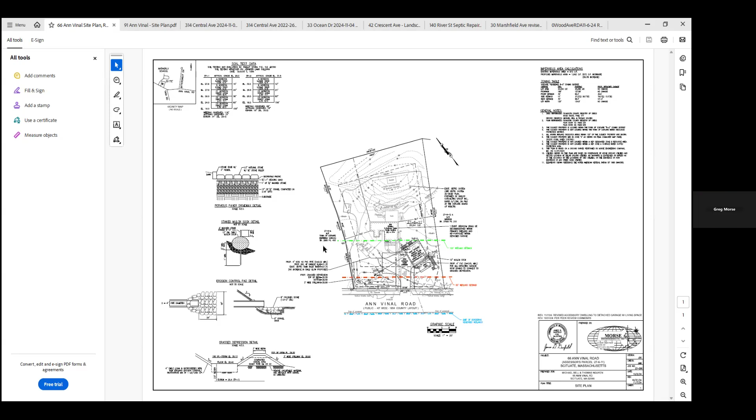Jen? Yeah, I'm familiar with this, I grew up on Ann Vinal. Same comment as Penny - I appreciate that we're really out of the 50 on this and pushed back, looks like, as kind of as far as it could go reasonably.

Okay, Eric? Yeah, it's one of those funny setbacks, right, where the road is in between the 50 foot and the actual bordering vegetated wetland. But no comment really or question, I think everything looks good.

Thanks, thank you. Richard? I'm good. Jen? Or comment - did anybody in the audience have comments for this one? I don't see any hands raised.

I don't really have anything to add to Eric's point with the wetlands being on the other side of the road. It's already separated by a paved road and a sidewalk, and it's pretty much a developed area now anyway, so I don't see any issues there.

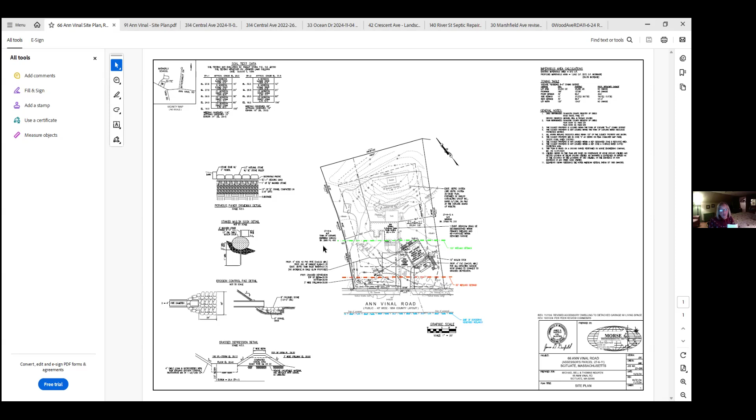Okay, can we close and issue, Jen? That's fine with us, that's fine with me. Okay, I make a motion to close and issue orders on 61 Ann Vinal Road.

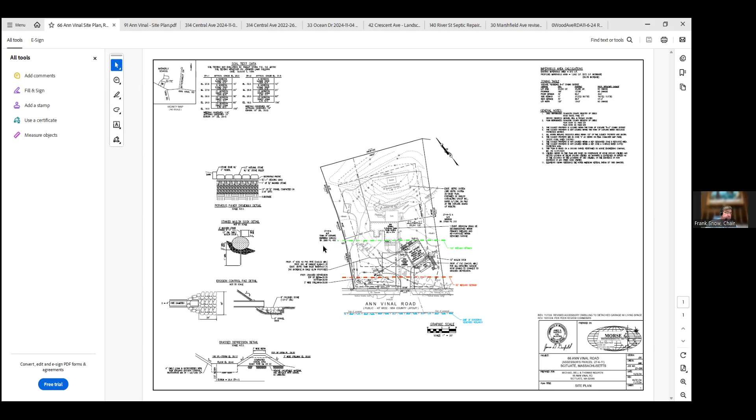66, oh I'm sorry, 66 Ann Vinal Road. That's from Penny, do I have a second? Second from Jen. All in favor - Richard, yes. Eric, yes. And Frank, yes. Great, thank you, thank you.

So now we're on to 91 Ann Vinal Road. This is a new one, on December 16th, 6 p.m., the Scituate Conservation Commission will hold a wetlands hearing under Chapter 131, Section 40 of the Massachusetts General Laws and Section 30700 Town of Scituate Code of Bylaws regarding the notice of intent application of Lennox Realty Trust for installation of a septic system and drains associated with the construction of a new single-family dwelling located at 91 Ann Vinal Road. Abutters and other interested parties are invited to attend. Information on how to access the virtual meeting is available on the town website.

Great, thank you again. For the record, Gregory Morse, registered engineer, Morse Engineering, representing the applicant Lennox Realty Trust. This is a notice of intent associated with the site work at a new single-family home at 91 Ann Vinal Road. The site is 20,089 square feet, all of which is upland area. To the left, the southwest corner of the property, off-site in blue, is a bordering vegetated wetland. Extending off of that is the line in red, which is the 50-foot no disturb zone, and in green, the 100-foot wetland buffer zone.

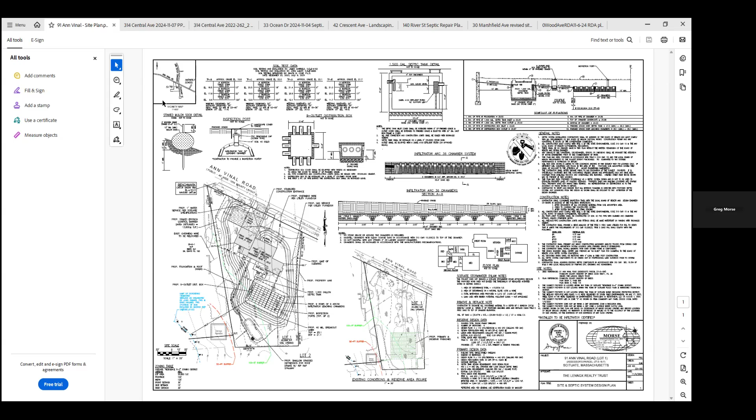Can we zoom in a bit more on the plan? Yes, no comments from DEP.

Most of the work is out of the 100. Having said that, the grading is for the septic that is needed for the house. There are some established trees that were lining the previous driveway. I assume they're coming down. Yeah, the house would kind of be in that area.

There was a concern from an abutter a few doors down on Ann Vinal about water from the front yard and driveway going towards the road and heading towards her home. That was just a concern from an abutter that I shared with Morse Engineering, and I wasn't sure what more could be done in that front yard area.

The only other thing I wanted to mention is the house next door that's being proposed will be on our January agenda.

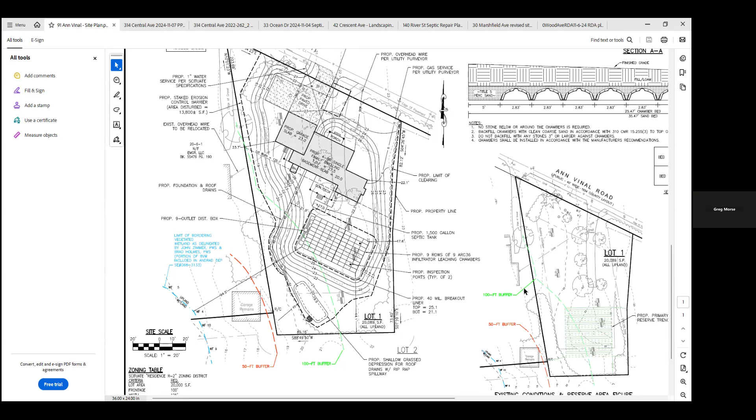There's an area sort of off the sun deck with a 20-foot contour that bends in - there could be a tree there, one more towards the street, out near lot 1. Just seems like there ought to be some replanting, the site's going to get stripped almost entirely. Yeah, I can understand that and have our botanist put together a planting plan, adding some native trees around the site. Certainly, we can do that.

Well, why don't we get that on the plan, and then we can close and issue at the next meeting if everything's in order. That would be great. So you're talking about the 6th of January, right, Jen? Yes.

I'll make a motion to continue 91 Ann Vinal Road until January 6th. I'll second that. Motion by Penny, second by Richard. All in favor? Jen, yes. Eric, yes. And Frank, yes. Thank you, Greg. Have a good night.

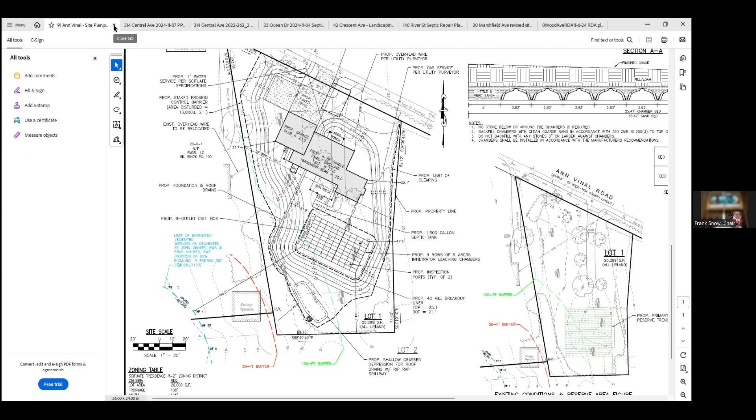314 Central Ave. Central Ave. A deck. Bear with me for one second here. Making a big mess for Josh to sort out.

On December 16th, 2024, at 6 p.m., the Scituate Conservation Commission will hold a wetlands hearing under Chapter 131, Section 40 of the Massachusetts General Laws and Section 30700 of the Town of Scituate Code of Bylaws, regarding the notice of intent application for Brad Stanbridge for construction of a new deck located at 314 Central Ave. Abutters and other interested parties are invited to attend. Information on how to access the virtual meetings is available on the website.

Darren Grady is on the Zoom. If there's anybody else, if they could raise their hand. I see Rick Grady, there he is. Yeah, Rick's on the meeting to take care of this one. He's raising his hand. All right, got it, sorry. No problem. There we go, I'm in now. Okay, all set? Yep, thank you.

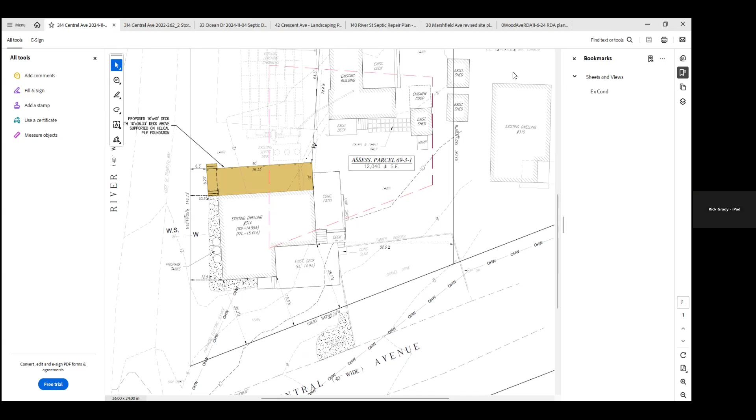Rick Grady from Grady Consulting. This is a proposed deck at number 314 Central Avenue. The proposed deck is 10 foot wide by 40 foot long along the full length of the back of the house. It's a two-story deck, with an upper and lower portion. It's going to be constructed on helical piles, with vertical posts set onto the helical piles. No enclosures or anything proposed below the deck, so it's not going to inhibit any flow of stormwater within the flood zone for this area. I'd be glad to answer any questions you may have.

Okay, thank you. Jen, do you want to start? There weren't any comments about this one from DEP. It was 10 helical piles, I think. And the other piece was just to confirm it's an uncovered deck—I know it's a two-layer one. Uncovered, no roof. And just a reminder, our conditions would include not enclosing underneath the deck, but otherwise I didn't have any other comments.

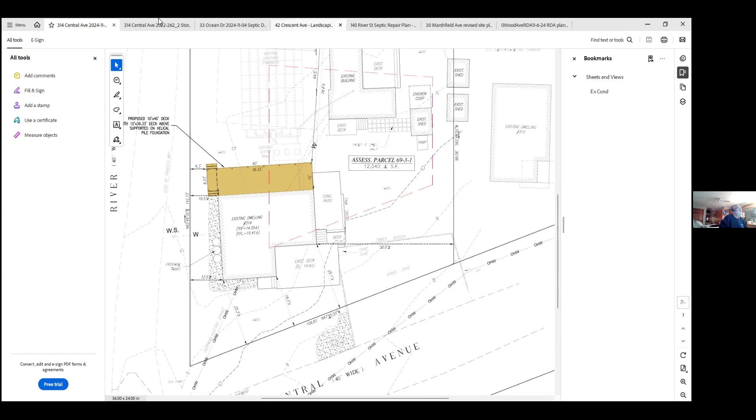Richard, it's your neck of the woods. Do we have a drawing of the helical pilings and all that? I just want to make sure we did. I don't really have a problem the way this is set up, I think it'd be probably okay the way it's described. I went up there today to make sure I was thinking right, and I think I am. At my advanced age, I have to go look. Thinking right's critical, but yeah.

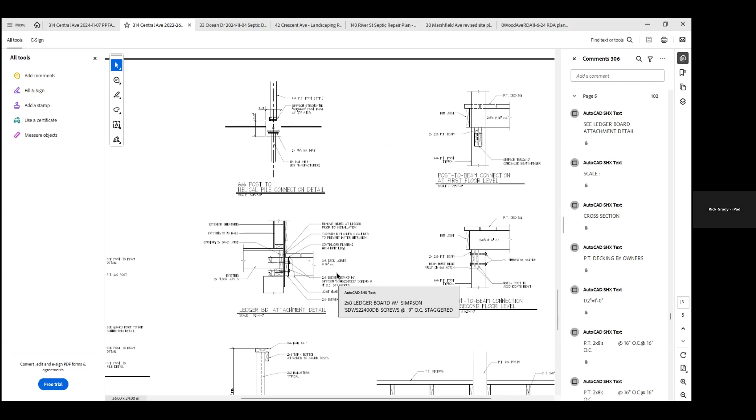Okay, we'll circle back. Penny? The only thing I questioned—there's no roof, I understand that, but it's a double decker, so the upstairs deck, the water will be able to get through the planks. I just don't want the water running off the upper deck. Typical. I believe they're specifying 5 quarter by 6 deck boards with spaces between the boards. The typical space would be about 3/16 of an inch. If the commission's more comfortable putting a condition to make sure there are spaces between the boards, that would be acceptable to the applicant, but I believe it's covered on the structural plan. I just want to make sure—I don't want them too tight. Okay, thank you.

Jen? I think I'm all set. Thank you. Eric? I also am good, thank you. Do we have anybody in the audience on this one? I do not see any hands raised. Okay.

I think, to Penny's point, some of these decks can be built with a product under the deck boards on an upper deck so that water gets shed off, and although it doesn't look like a roof, it really becomes a roof for the lower structure.

Just want to be sure. I'm not seeing any of that on the detail, Penny. No, I just wanted to make sure, since I'm not an expert like you are, Frank, I can't read all this stuff. Well, I just wanted to be sure. It's a double decker. Yep.

Okay, so can we close and issue, Jen? Yes. Can I make a motion, Frank? I make a motion to close one. No, that's not one, it's 314. I'm on the wrong street. 314 Central Ave, and issue.

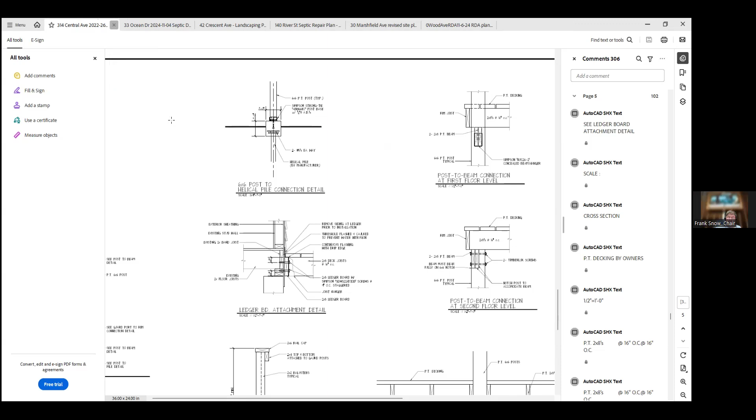That's the motion from Penny. Do I have a second? Second from Jen. All in favor? Richard, yes. Eric, yes. Frank, yes. Okay, that one's good.

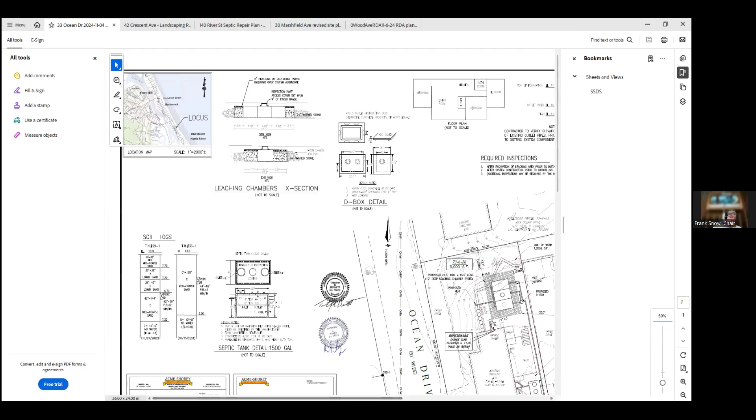Now, 140, I think. So then, 33 Ocean Drive. Yes. Oh, done, 140.

On December 16th, 2024 at 6 p.m., the Scituate Conservation Commission will hold a wetlands hearing under Chapter 131, Section 40 of Massachusetts General Laws and Section 30700 Town of Scituate Code of Bylaws regarding a notice of intent application of Douglas and Barbara Grace for repair of an existing septic system located at 33 Ocean Drive, Scituate. Abutters and other interested parties are invited to attend. Information on how to access the virtual meeting is available on the agenda posted on the website.

Thank you. Rick Grady from Grady Consulting again on this one. This is a property at 33 Ocean Drive on the corner of Franklin Street, an existing home on a 50 by 100 foot lot, 5,000 square foot small lot. They currently have two cesspools to the rear of the house along the right-hand side of the plan. They want to pump and remove those cesspools and install a 1,500 gallon septic tank and a leaching chamber by gravity system on the upper portion of the lot. It is a fairly tight lot. We've requested a setback local upgrade approval from Board of Health to reduce the setback to the property line to 5 feet. The location is basically in a depression or hole, within flood zone elevation 17. Grades in the area of the system are approximately elevation 11. We did not show any erosion control on this because it is at the low point of the two properties side by side here. I'd be glad to answer any questions.

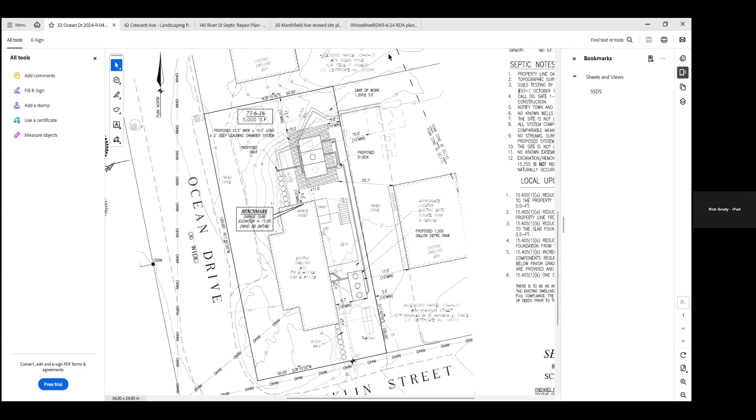So, but now it's 42 Crescent Ave? Right. When they originally filed with us, it was 0 Crescent Ave. Now they have a street number at 42. So I'm going to open this as 42 Crescent.

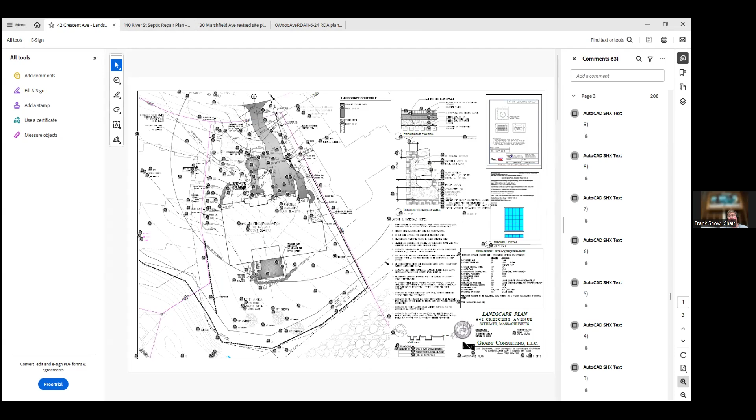On December 16th, 2024, 6 p.m., the Scituate Conservation Commission will hold a wetlands hearing under Chapter 131, Section 40 of the Massachusetts General Laws and Section 30700 Town of Scituate Code of Bylaws to amend the order of conditions issued under DEP file number 68-3096 and deliberate a stormwater application as submitted by Antonio Andrade for work related to the construction of retaining walls and foundation work at location 42 Crescent Ave, Scituate. Abutters and other interested parties are invited to attend, and information to access the meetings is available on the agenda posted on the website.

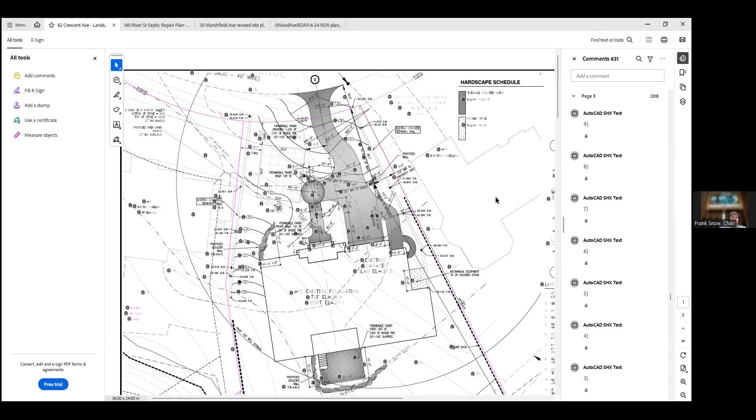We have Jeff DeLisi. Yes. Hi, members of the commission, Jen. Jeff DeLisi, Ohrenberger, DeLisi, and Harris. I'm actually sitting here in my office with Paul Marabito, so Paul is with me as well. You can hear me, right? Yep, okay great. So y'all might remember me and my involvement in this project.

The owner of the property reached out to me because I have knowledge here. To be honest with you, I was a bit reticent to represent him. But I also represent the new owner of the property, which is down gradient directly on the south. And I kind of viewed this as an opportunity to use my knowledge of the project, the fact that I've been in front of this commission many times, and hopefully I have a reputation as somebody who can interject some truth into this. I have an opportunity to help design this and ensure that this project does not have a significant or really any impact, or at the very least is acceptable to my client adjacent to it. So here I am.

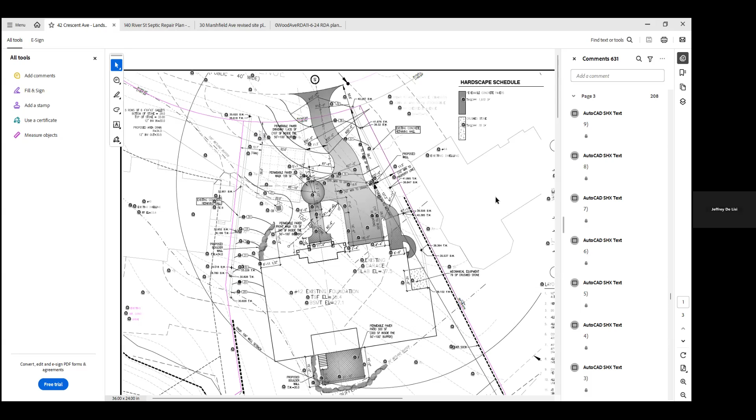We've added as mitigation a significant number of trees, shrubs, grasses, roses, and perennials. We're talking 228 additional plantings that you would see on sheet 2 of your landscape plan. Jen, I'd love it if you could bring that up. That chiefly is along both retaining walls and towards the bottom of the property.

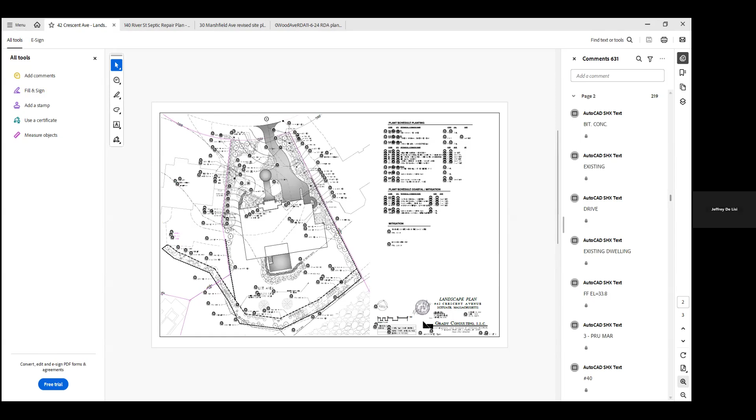Additionally, there's going to be a retention area which is going to capture roof runoff. That'd be sheet 2, Jen. This is, I think, sheet 3. There's going to be a retention area in the front of the property, which is going to capture roof runoff, as well as runoff from the site between the street and the home. And that's going to be kind of to the left of that circular area.

So we have recharge areas, we have significant mitigation plantings, and actually the retaining walls, they kind of help to contain the water on the site. So actually, at the very least, my other client, you're going to see that there's going to be less water running to that property than what the site was in its vacant state. And you're going to also see that there's going to be less water running to the swale along the top of the coastal bank out in the back than what was previously approved. So we think it's a significant change.

We're committed to making the change. I do ask that the commission humbly consider allowing us to begin framing the project as we work through these issues. And I was hoping that the commission would see that there's a significant commitment here to getting this right.

So with all of that, I am sitting with Paul. If you have any questions for Paul, but I'll give it back to Jen or Frank or whomever to ask any questions you want. Obviously, we would be asking for continuance to address Deb's issues and to receive any additional issues and questions she has.

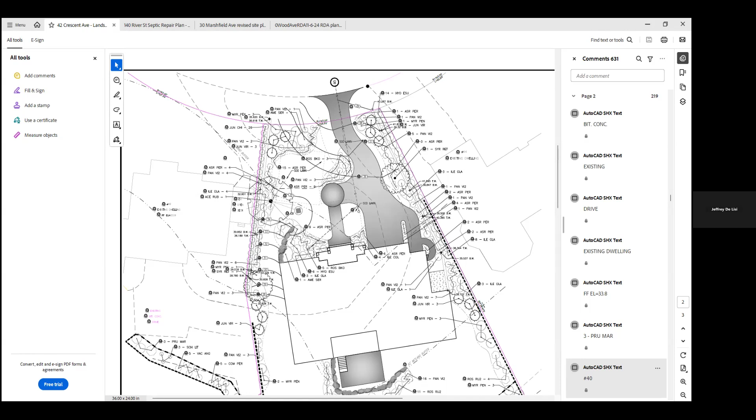I guess we should have our old plan with us. Yeah, the one thing I do recall is that the wall proposed behind the patio on the order of conditions plan, which was previously approved, was a concrete wall. So one of the key changes here is that this would be a boulder wall as opposed to a concrete wall. That's one thing that comes to mind. That's going to be part of Deb's review, but I think the patio is slightly larger than what it was previously proposed to be, but it was proposed to be there. And yes, the wall does kind of wrap around a little. What you don't see on this plan on your screen is there's a whole bunch of plantings on the ocean side of the wall, so to speak, which were not previously proposed at all, like roses and things of that nature.

Okay. Well, I think you've heard from the members what they're looking for - Eric's question about maybe switching up some of the plant material, wanting to see the whole plan, and wanting to hear from Deb on how some of this all fits together. Maybe what would be good is for the next one, I'll try to make sure I have a copy of the old site so we can see the differences.

Did Deb give us any idea how soon she could get back to us for the review? I think she needed some of these questions answered first. Okay, so Paul or Jeff, do you know how quickly they can? You're saying maybe some of the answers are there, but they're on different plans, so maybe it's better if an engineer can get with her to go through some of that. Frank, I spoke with her this morning and she was going to put together a full list of what she's looking for. I said, send that to Jen, we'll take it and work on the plans and get them back to her so she can review them. If she has questions on the revised plans, we'll work with her on that.

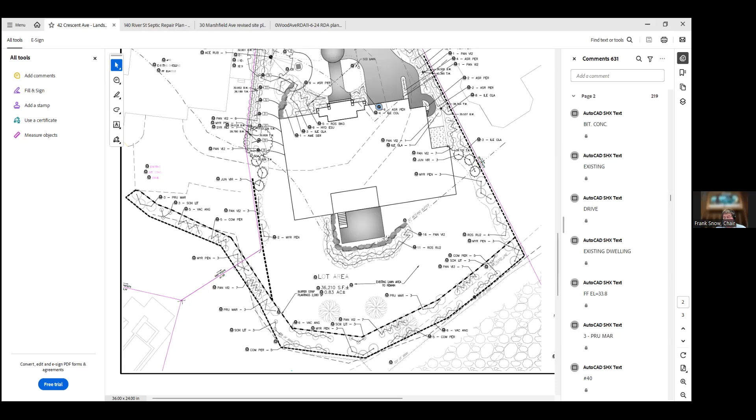Okay, thank you. Thank you very much. Have a happy holidays. You too. Thank you, Jeff.

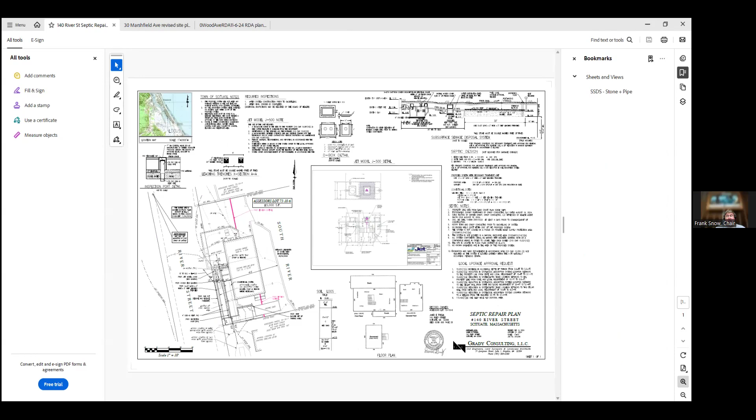140 River. On December 16th, 2024, 6 p.m., the Scituate Conservation Commission will hold a wetland hearing under Chapter 131, Section 40 of the Massachusetts General Laws and Section 30700 of the Town of Scituate Code of Bylaws, regarding the notice of intent application of James Triglia for repair of a septic system at 140 River Street, Scituate. Abutters and other interested parties are invited to attend. Information on how to access the virtual meeting will be available on the agenda posted on the town website.

Good evening, I'm Darren Grady from Grady Consulting, here on behalf of James Triglia. The project before you tonight is a septic system repair. It's on a 5,000 square foot lot, within the riverfront of the South River, in land subject to coastal storm flowage, elevation AE 14. It's coastal dune and a barrier beach.

The proposed septic system is in the location of the existing septic system, where the tank is proposed right now. The existing tank is oriented 90 degrees from that, and there's two leaching trenches that are 32 feet long. There currently exist leaching trenches underneath where they are, but they don't extend all the way to the southernmost property line. The location here is the furthest away from the river that we could locate it.

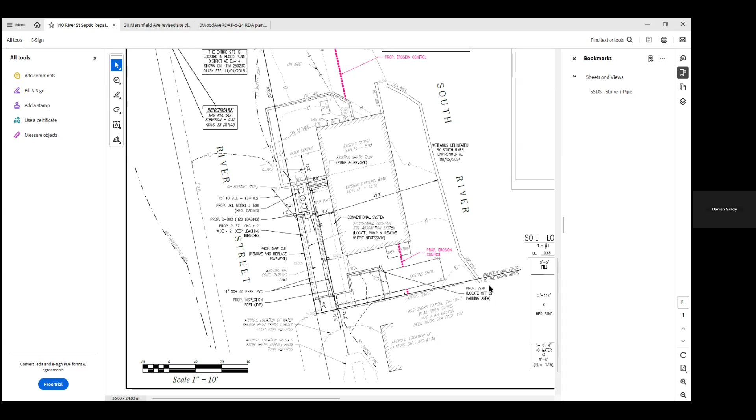The system's currently not functioning, so I would like to give them the opportunity to replace it. They didn't give me a schedule. Can we do that, Jen?

Yes, we do need revised plans at least a week before, and with the holidays that number gets a little bit bigger, so that's just my reminder about that. It is an exceptionally full agenda, so we definitely need everything in advance.

So that would just be the pavers versus the pavement if my client agrees to that. If anything changes on the plan, yes. Okay, I can do that.

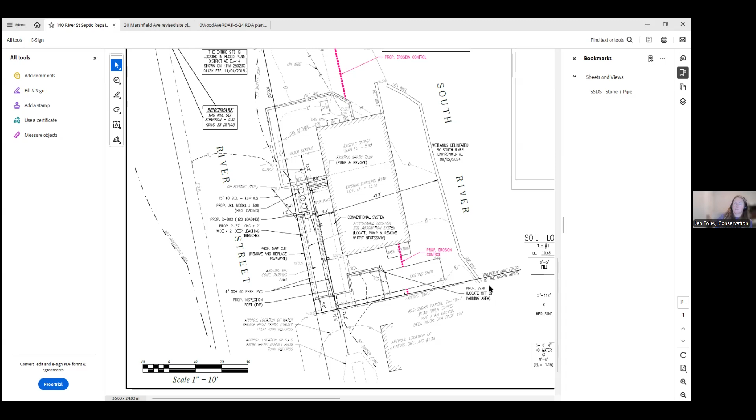So get a motion. I make a motion we continue 140 River Street to January 6th. I'll second that. Motion by Penny, seconded by Richard. All in favor? Jen, yes. Eric, yes. Frank, yes. Okay, great, thank you. Appreciate you putting us on for the 6th. Have a good night.

On December 16th, 2024, at 6 p.m., Scituate Conservation Commission will hold a wetlands hearing under Chapter 131, Section 40 of the Massachusetts General Laws and Section 30700 Town of Scituate Code of Bylaws. We received a notice of intent application for Stephen and Elizabeth Tripp for the installation of a new septic system and accessory dwelling located at 30 Marshfield Ave, Scituate. Abutters and other interested parties are invited to attend. Information on how to access the virtual meetings is available on the agenda posted on the website.

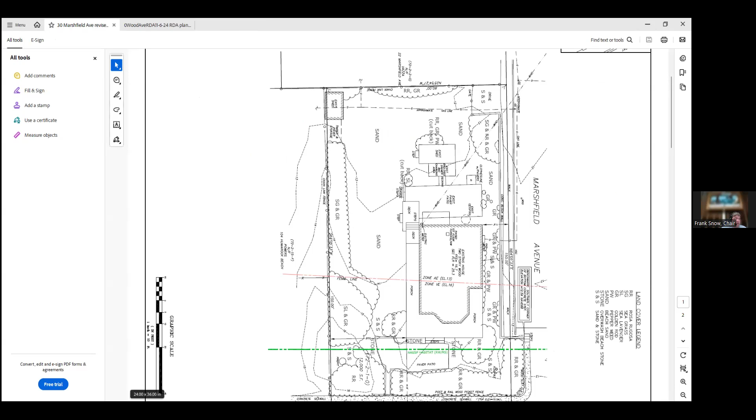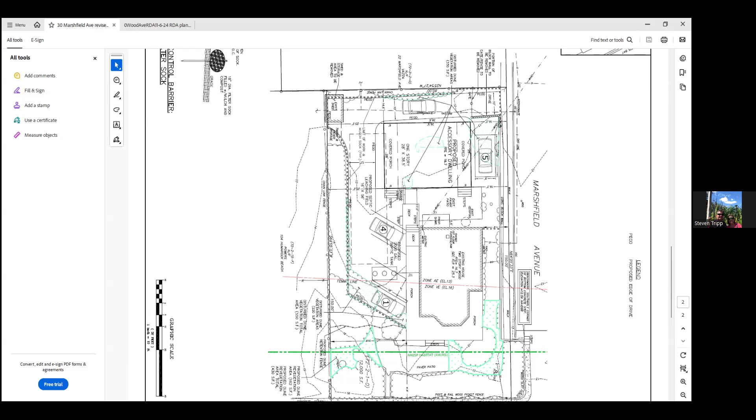Good evening, Mr. Tripp. Good evening. So where to begin? My wife Betsy and I purchased this property back in 1985. We had no business doing that. We couldn't afford peanut butter for dinner. So what we've depended on for the last 40 years is short-term rental income on the primary cottage structure.

We both turned 65 and 66 this past year and hope to downsize and retire in Humarock. We have determined the best approach is for us to pursue an accessory dwelling, for which we have a design and which we presented to town planning last month with a continuation to January 9th. Obviously, to extend that, we do need to upgrade the septic system, which is also part of our application.

We have a design that encompasses a 2,000-gallon tank of an H20 style to be able to accommodate the weight of vehicles. And we have a 920 square foot leaching field, which is currently to the southern side of the existing structure and the proposed accessory dwelling.

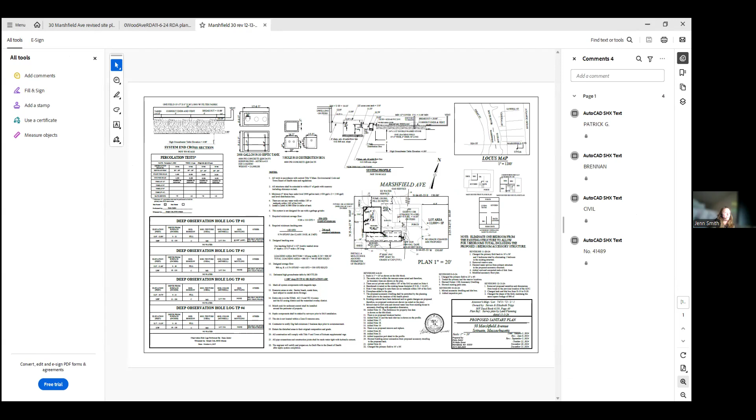Do we have a septic plan? Yes, a revision was submitted to the Board of Health on Wednesday. I think I copied you, or someone copied you on that as well, Jenn, right? So this was one that we received last week, and then today we did get one that shifted it a bit so that none of it was underneath the proposed dwelling.

Correct, you see the jog there that was on the westerly side of the leaching field? If you go back to the original plot plan image, you'll see the dotted line that runs on the southerly elevation of the property, of the accessory dwelling. That was about a foot under a porch. To accommodate the request by Joan, we adjusted the shape of the leaching field to go around that. So effectively, pretty straightforward. Okay.

But this is applied for under one filing, Jenn? Yes, this is one filing.

So the house that's there—I don't think that is elevated. The proposed one, we are at the lowest horizontal members at 15.8, and grade at that point is 13.1. So the existing 100-year-old house is elevated, but not to the V zone requirements.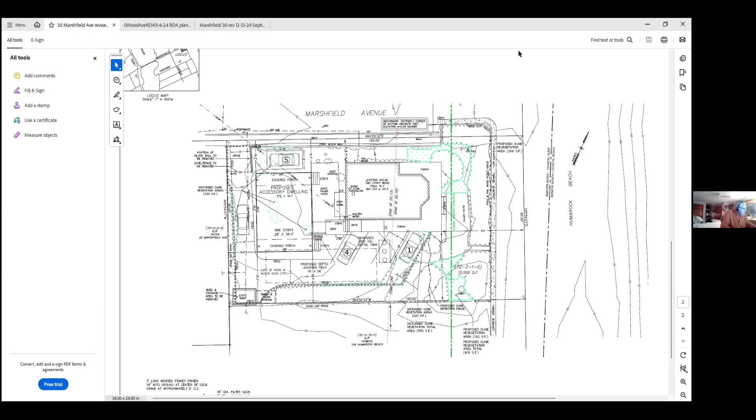Okay, so I'll make a motion. We continue 30 Marshfield Ave to January 27th. I'll second that. Second from Richard. All in favor, Eric?

Do we have Eric? Yes. And Frank? Yes, sorry, yes. Thanks, Eric. Okay, thank you very much.

You're welcome. Now, the next one, I have to recuse myself. But then there's only three of us, so we can't hear it. Is that what we're down to? Yeah, without you it is. Yeah, Jen had to leave. Well, we can't do it.

Can we open this? I think we can open it and then continue it until you have a quorum. You need me to open it? Yeah, Jen, yeah, right. Richard, do you want me to email it to you? Yeah, I guess so. I used to know it but I don't have it memorized.

All right, I mean, can we open it - if we don't open it, it would automatically continue to the next available meeting. If you don't open it? I think we can't go to the next meeting, it's already overflowing. I think you have to open it.

You got Brad Holmes with a hand up too. Yep, okay, Brad, I'm going to unmute you. And I'm sending this to Richard also. And I have to get my other computer, hold on a second. Okay.

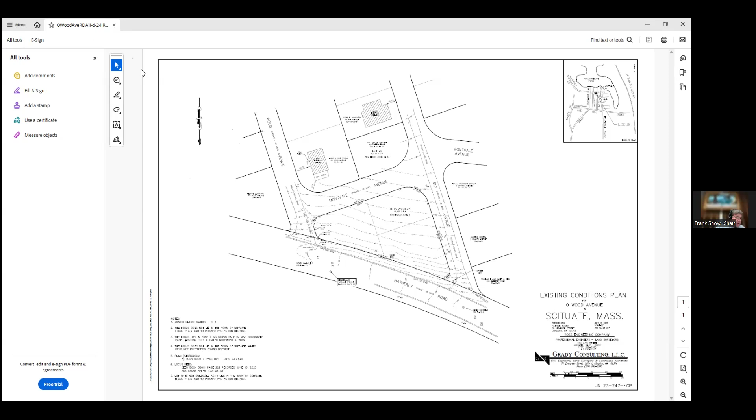So where are we at? Certificates of Administrative Compliance item. Yeah, yep, certificate of compliance. If we have to vote, we can't. Well, no, we can. You're back, Frank. Yeah. Yep, a COC we don't vote on.

So a partial for Brook Street, Jen? Yes, they are done. The house is for sale. They've put their plants in. They're waiting the growing seasons. And hold on, Brad was part of that one also.

Brad, you're unmuted. Thank you, members of the commission. We would like to request a partial certificate of compliance for 31 Brook Street. The project actually constructed less than the order of conditions approved. We had an order of conditions approved in 2023 for a home improvement project with additions, a garage, a deck, a driveway extension, in-ground pool with retaining walls and whatnot. Bill Good is on the call tonight as well. He completed the project. He didn't install the retaining walls or the in-ground pool with patio. But the portion of the project that was in the riverfront still required mitigation, so there was a mitigation planting plan that was completed. The completion report was submitted to the commission.

We know that we wouldn't be in the position to get a request for full certificate of compliance because the commission would be looking for success of the mitigation planting area for at least 2 years. But we would like to confirm with the commission that the rest of the project is in compliance, and that allows Mr. Good to proceed with selling the home. The other aspects of the project will be maintained to include maintenance of the mitigation area and reporting. This gives us some certainty that the project was completed as the commission approved. The remaining portions of the project will remain open until we can go for a full certificate of compliance after the planting area is successful. I can bring up plans and photographs, but that's the gist of it.

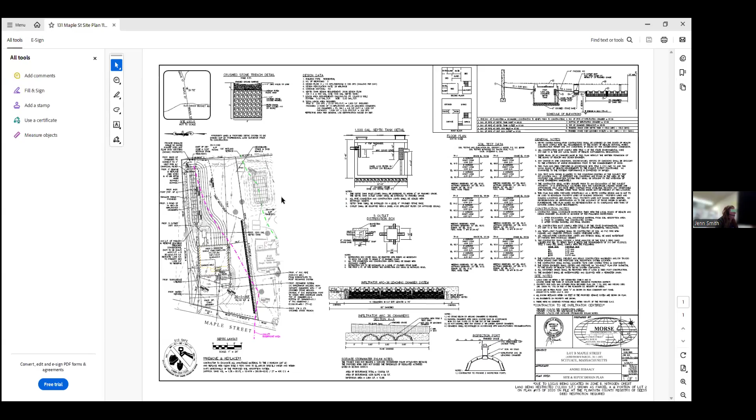The house would go a little bit closer to the road. One of the things we had conditioned originally, but had not put on the plan, was adding some infiltrators. This is in the Water Resource Protection District. So we asked them to put that on this plan.

So they've added that to this, which should then make it... I can't see the plan. I'm sorry, I opened up the wrong one.

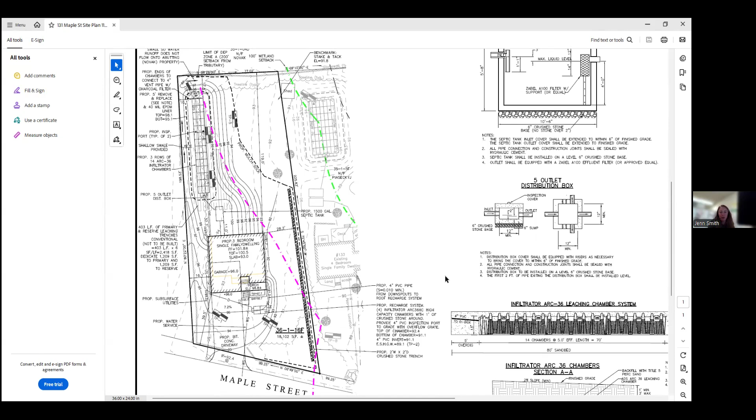In order to deal with the extra impervious surface they're adding to the site that wasn't originally permitted, which although is out of our jurisdiction, the whole site is in the Water Resource Protection District, which has limits to the amount of impervious surface you can introduce without stormwater components. So if you think this is okay as a modification, we can accept it, or if you want them to file an amendment, we can do that. But they've added to the plan what was asked of them for the additional driveway and bump out in the front of the house for a garage.

Penny, your thoughts? No, I'm fine with it. Richard? Yeah, with the infiltrators put in, I'm fine with it. Eric?

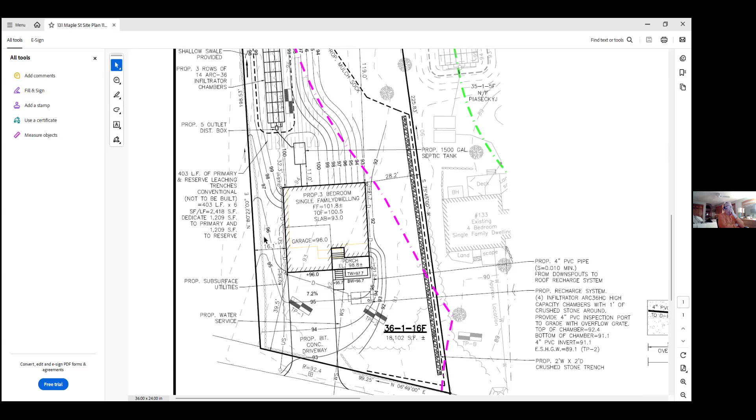There would be no benefit of going the other route in terms of the water resource area, right? I'm just asking, not saying I'm advocating for it, but just inquiring. So usually there's two means of doing that - you can either have a minor modification that we can just approve, or you have to amend the orders, and that would be like the one we had earlier, on Crescent, where we almost start over.

So in this situation, a minor mod seems perfectly reasonable. Do we need to vote on this? Nope. Okay, go ahead.

Anything for enforcements you want to fill us in on? Not today. Good, thank you.

Minutes - somebody want to vote on those minutes? Yeah, I forget, they're 11/25 I think. I make a motion to accept the minutes as written for November 25th. I'll second that. All in favor? Richard? Yep. And Frank, yes.

Let me give you a quick lowdown. The Driftway Park improvements are almost done, they've done a great job. Jen's been out there a couple times checking on it, Paul Scott's been doing that as well. The main loop is looking great. They've got a little bit more to finish up, but glad to get those improvements done with the weather we've had. Got an email from the Trails group - they've been out there after a couple storms, and as usual they've got the place all picked up, trees out of the way almost instantly. It's amazing, and we're fortunate for that.